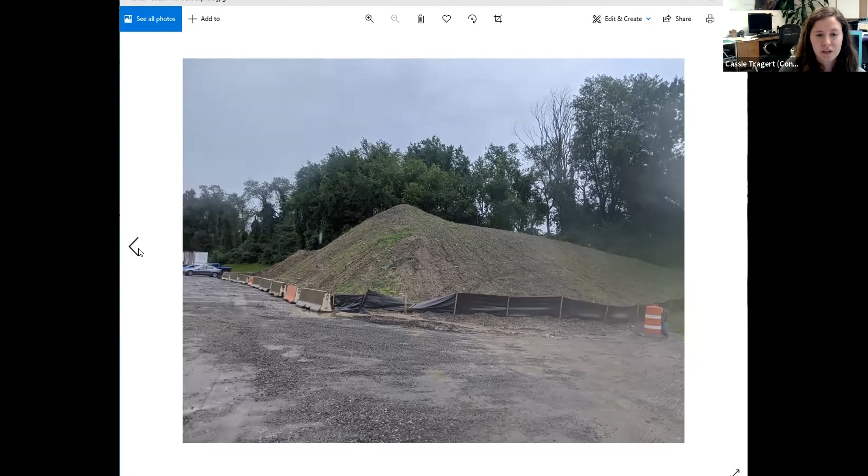This first image is the stockpile we were talking about. It has silt fencing and straw wattle on this side, and these kind of barriers. Let's take a closer look at this stockpile. The catch basin is to my rear and left here, so a ways down to the left—here's a picture of that area. This is looking back; the catch basin is more over to the right. This is the front, kind of coming down this way.

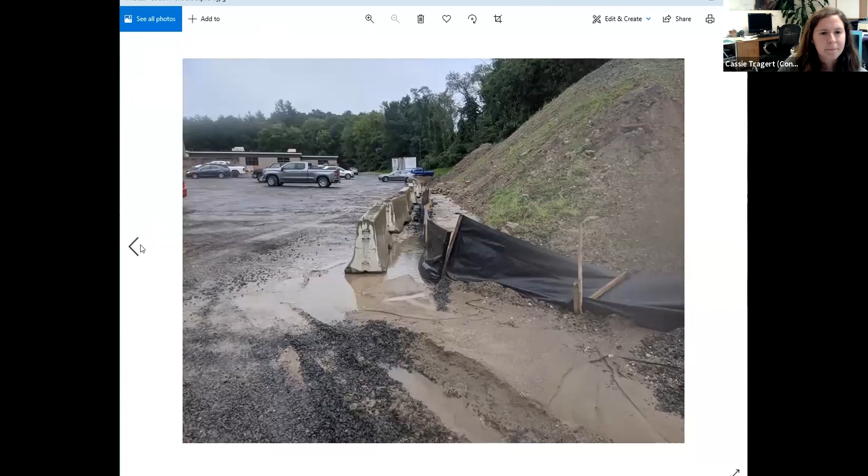So it seems like there's a lot of material on the down-gradient side of that siltation barrier. Yeah, I'll add that we did add a berm on the opposite side—you can't really see it in the photo—to give that silt sack and catch basin more opportunity to collect water and hold it on site.

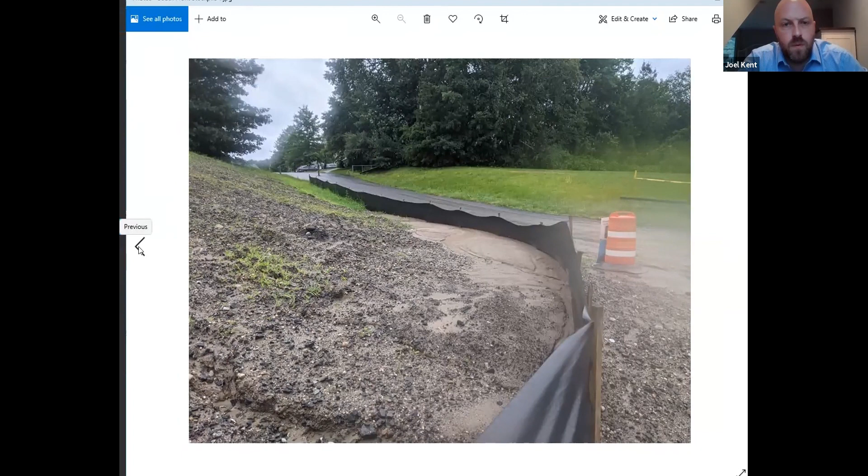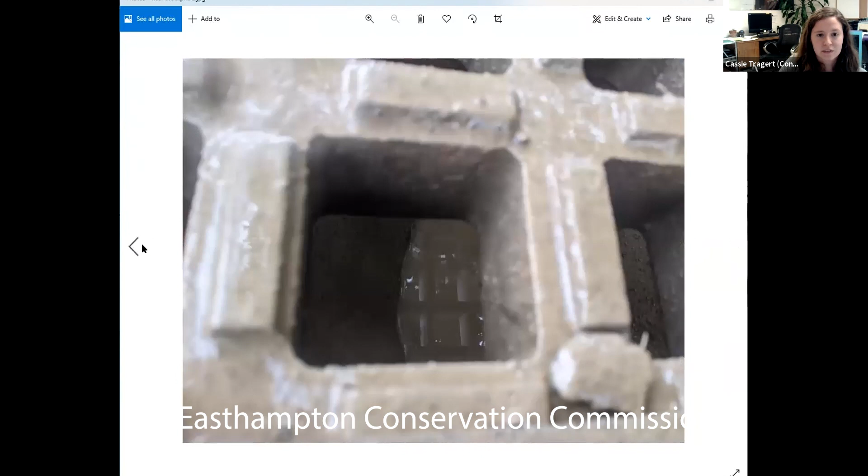This is approaching the area, and the stockpile is to the left over here. This is where they have this gravel berm—I believe that's the catch basin right there, and then there's silt fencing. That catch basin leads to an outlet that's kind of behind me in this picture and leads down this way, further towards the brook that's down there. This is the outlet itself.

Can you go back to the photo that showed the catch basin with that sack in the background, with a bit more of the landscape position? This one? Yeah.

So are there any supplemental measures that could be installed—since it's not in the middle of the parking lot—to intercept runoff first and filter out some of that material before it gets trapped in the silt sack device? So, is it possible to pre-treat before the BMP?

Yeah, one of the issues we've run into on this site, given how fine the sediment is, is that our filtration measures—typical wattles and so forth—aren't as effective as they might be on a normal site. We've done multiple layers of wattles and silt fence in many areas, which has been more effective. We've also put floc logs in most of the structures, though that's a more limited effect, just another thing we thought might help. In terms of pre-treating, we've been trying to do that and think it has been at least somewhat effective.

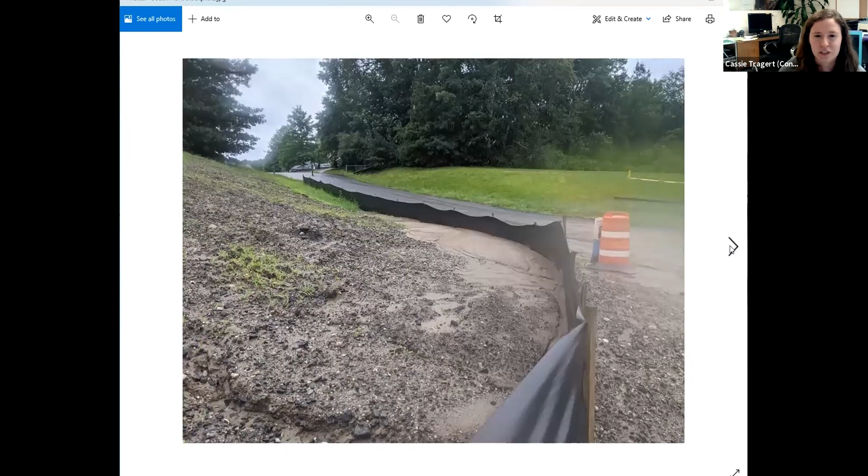Let me see, I should have a picture. Actually, this way.

So this is the inlet of the culvert, and then it goes through, and on the other side is the outlet where the turbidity curtain is. It was really overgrown here, so it's kind of hard to get access. But it certainly didn't look as turbid. I know there's sand built up here, but I don't know how long that's been there.

These culverts also don't have bottoms. You'd obviously see the stones. So that's the bottoms rusted out, I'm assuming. Yes, yeah, these were not to be changed through the scope of work. Understood.

And can you show photos of that turbidity curtain? Yeah, Cassie? So the catch basin area is behind me and to the left. There was an issue of water leaving here, and they put all these curtains that seem to be catching it there.

So this is the area up gradient of where the turbidity curtain is. You can see there's been seeding happening. This is the area between the basketball court and the parking lot where it was freshly seeded. Looking a little further, more up gradient, this is immediately before the area where the outlet is.

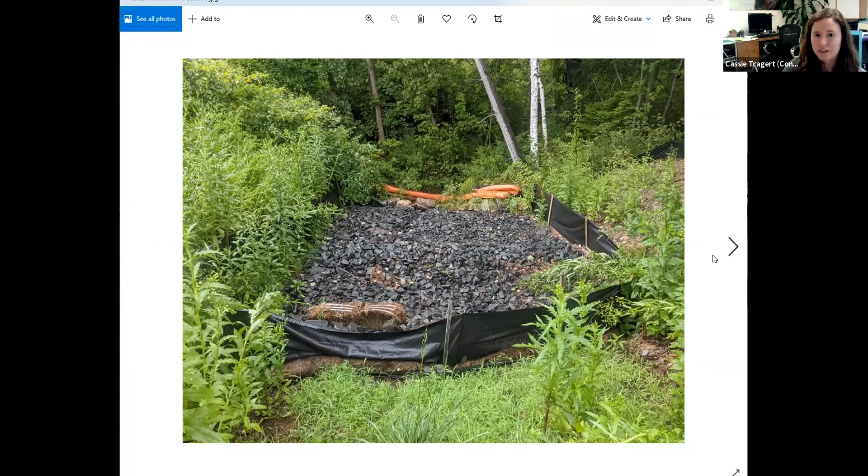This is the outlet itself, and there was silty water leaving the outlet. You can kind of see it here and here, and then that leads to this turbidity curtain, which is where the outlet is. That's the curtain, and this crease is where in some of the videos you could see it failing or overtopping at that point, but the water is clear, and here you can see it adding at this point, so it's not undermining it.

So on days where it's not a huge amount of rain, it seems to be functioning enough. They've already made an adjustment since the site visit - they sent me a photo where they've raised it up much higher, because this thing itself is 6 feet tall. Right now it's not super high off the surface of the water, and by the time they changed it, it's more up here, I'd say, roughly how high they raised it.

What has secured that at the stream bed? How is that secured at the bottom? At the bottom, I think it's these boulders placed to hold it in place. You can certainly see that where it's working quite effectively. The water trapped behind the turbidity curtain is quite turbid looking.

And do you have a close-up of the stream downstream of this, Cassie? Or could you? Actually, I don't. No, sorry, this is as far into the stream as I went.

After we added the turbidity curtain, around that time, I think it was last April, we walked the stream bed with the civil engineer to look for signs of sedimentation. And I think he produced a report for the commission at that time that basically said he saw no signs of sedimentation.

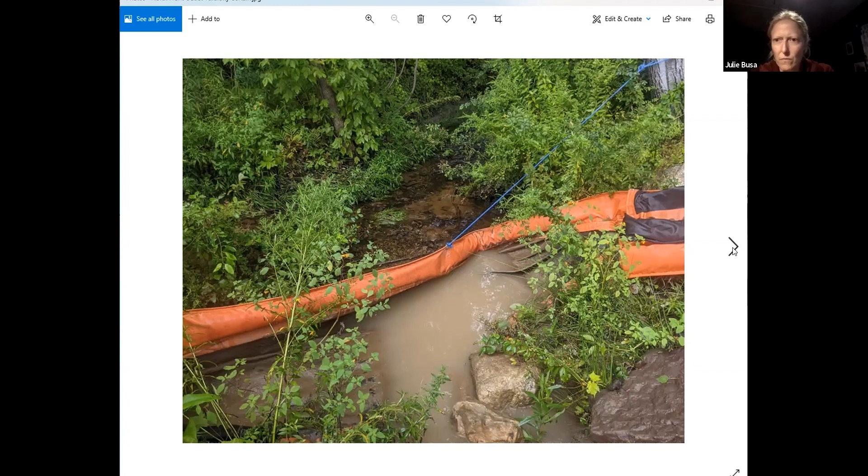So if there were a supplemental barrier at that catch basin, which of the two locations we've been discussing seems to be the bigger issue of the two? But Cassie, feel free to jump in and correct me if I'm mistaken or misspeaking.

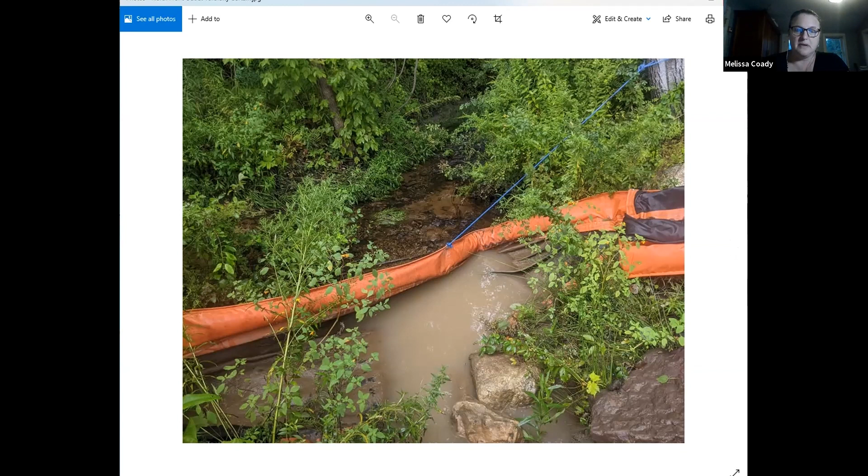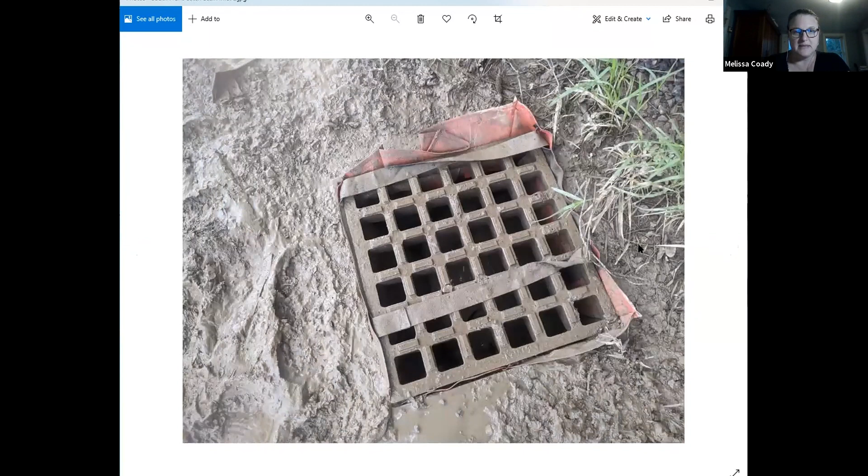If there were a supplemental barrier installed, it's just the way that photo looks, it seems like it would be somewhat out of the way, because the catch basin seems to be on the side near the edge of the parking area travel corridor, not sure what to call it there. If that were to redirect some of the flow that would normally go into that catch basin, what would the flow path be, and what would the BMPs at that down-gradient point look like?

It would fill up that area quite quickly and back up towards the parking lot, but the downhill gradient is towards that gravel berm. That gravel berm in the right of the photo continues for probably 20 feet to the right in that picture, and water will collect and hold in that area and dissipate, which is kind of what we want to happen.

That berm was originally erected to protect the slope. There's a downhill slope behind it that we were concerned about washout going down there, so that berm was put there to protect that slope. That slope has since been seeded.

If I was more comfortable with the quality of the water, I'd be more comfortable letting it get beyond there and follow its course into the detention basin, a bioretention basin just on the other side of that berm. But I don't want, at this stage of construction where we're going to be doing a ton of work on that side of the site later in the next phase.

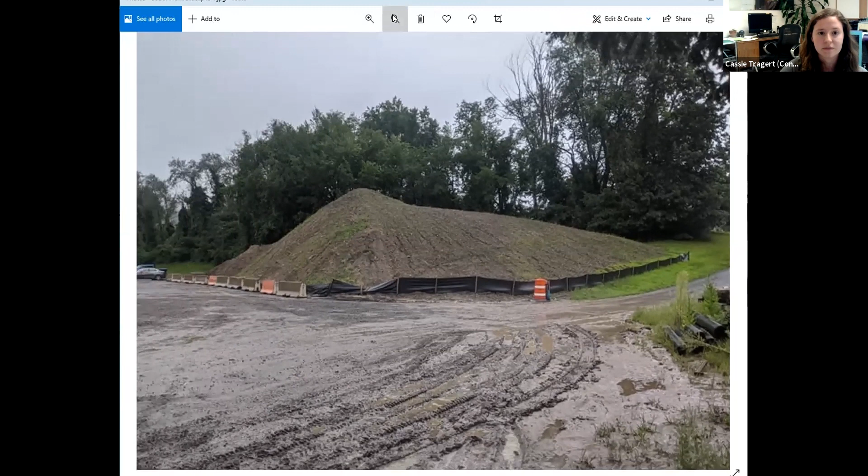Oh, the wrong way. Hold on, sorry about that.

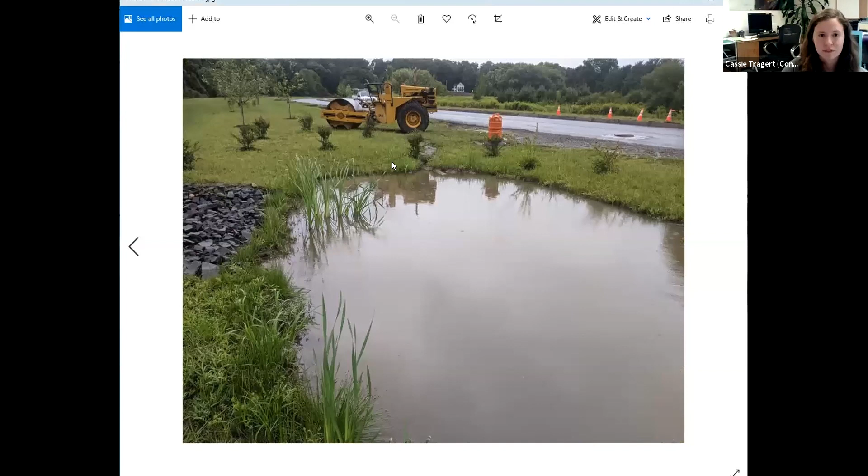So this is one of them, this is the other one. It kind of comes around, reaches these areas. The silt fences are to the left here, the series of silt fences—here they are. And then comes around, those two basins are around the corner here. So the stream outlet that I was looking at, which is in the woods, is to my left, and the berm is behind me, the gravel berm.

So Cassie, based on your discussions with DEP and your site visit today, what are your recommendations? Well...

You know, I guess I'm not sure what all the options are that the commission has available to it. The main thing was having this kind of enforcement order as a mechanism to do this third-party review. I don't know if that's the only way to do it, or if that's something the commission wants to pursue. And I don't know if, based off these two situations, the commission agrees that that's necessary at this stage.

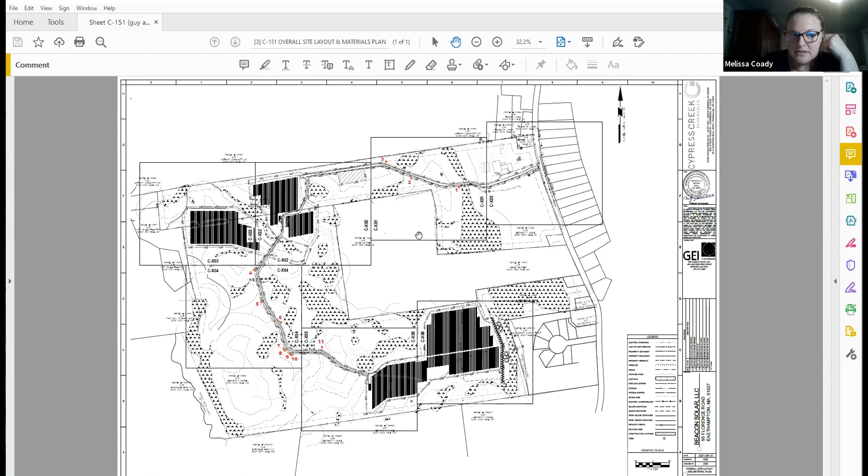So you can see there's 1, 2, 3, 4, up to 11. The ones shown are the ones that are within the 100-foot buffer zone. But like you said, none are within 25 feet. And I can zoom in on anywhere. Can you zoom in on that cluster around, down 7, 8, 9, 10, 11-ish, just that general region? Is that close enough, or I can do further?

No, I think those are clustered there because those two poles on the lower side of the road have two guy wires associated with each. So that's why you have 7, 8, 9, and 10. Those are really two poles. Is that because of the angles? Yes, it's because of the angles. Mhm. Okay.

And the dashed lines on these are the 100-foot setback boundary. So these are the pole locations, correct? Not the, or are those the guy locations? Those are the guy anchor locations. Okay, yeah, all the poles are within the limit of disturbance line.

I'm inclined to think that this is pretty minor, but I'm interested in hearing others' thoughts on the matter. I'm just thinking the helicals are not going to make much of a disturbance. It's whatever machinery you're going to have in there trying to install them, that would be the disturbance to me. Yeah, and primarily any kind of equipment like that would be located within the limit of disturbance area. Okay, reach over to install the helical? Right, I would hope so, yes.

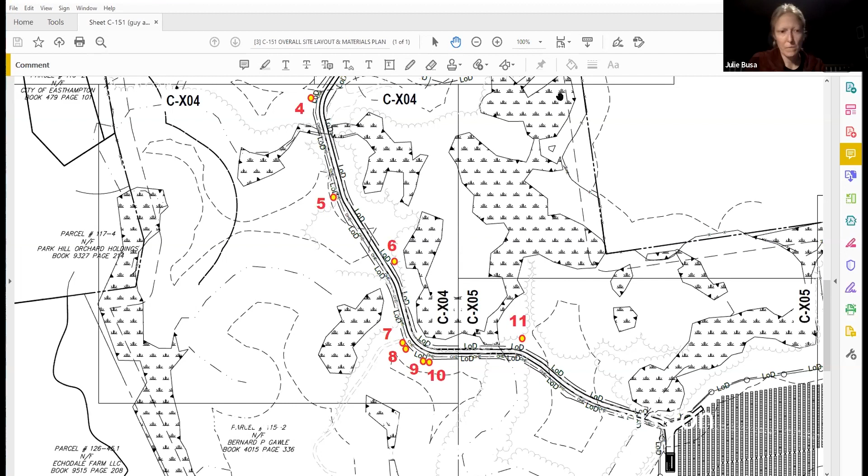Based on the fact that both DEP and the Corps under the Clean Water Act don't consider helical anchors to be fill because of their minimal disturbance, I am inclined in that direction. So I think the caveat I would say is that all equipment associated with the installation of these guy wire anchors should be situated within the limits of disturbance. That makes sense to me. Sounds good to me. Okay. Anyone else? Michael, Jay? I'm good.

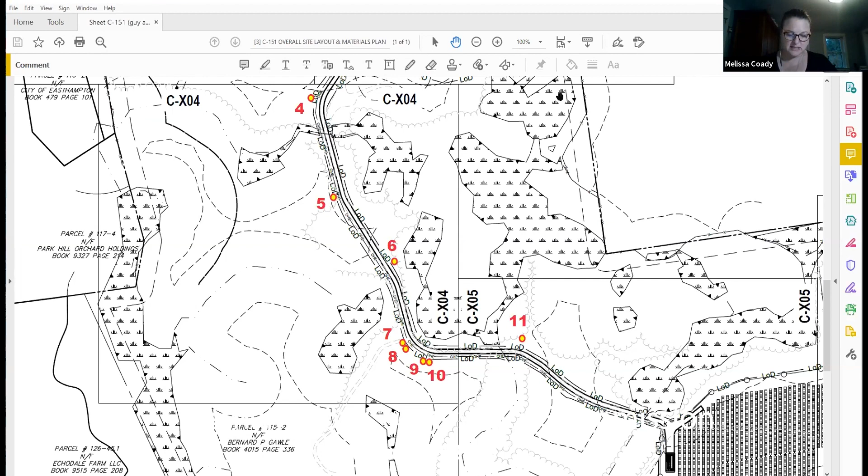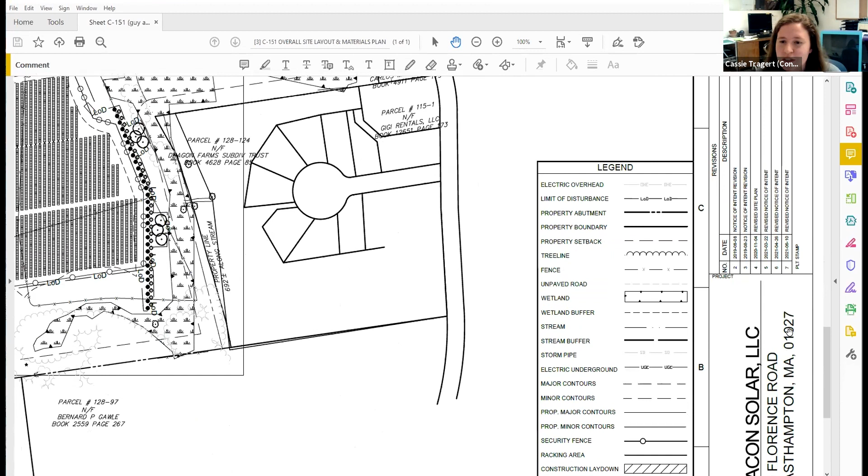Hold on, it looks like, what is that? 8/8? Nope, that's the wrong one. Hold on. I know you sent it to me after 6/10. Do you think it's maybe? Yes, I did not date this. Okay, put this together Friday. Yeah. What was the date you received it? On Friday, I believe, right? Yeah, so August 20th? Yeah. Okay, as received by the commission on August 20th.

Would anyone care to make that motion? I'll make that motion. Is there a second? I'll second. All those in favor, roll call vote. August recused, Busa aye, Buttrick aye, Ryan aye, Teffer absent, Whittemore aye. Motion carries. Thank you. Thank you very much.

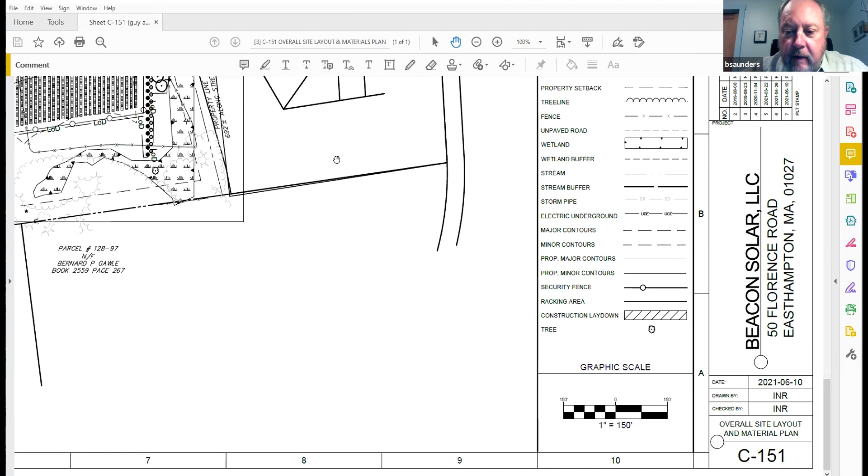All right, moving on to the third out of order agenda item, 8B, 32/50 Payson preliminary review. Cassie? I think you can go dark again, Mr. Buttrick. Okay, all right.

So this is for a question that was raised about Rubber Thread Pond, which is behind 32/50 Payson. It's in between the Rubber Thread Pond that is Williston and the Nashawannuck Pond. And the question is, does that pond have riverfront area associated with it?

There's been past permitting for 32 Payson for the safety complex that they did. And it actually, that permitting was completed right before or around the same time that the riverfront area part of the act was added, so it's not on those plans. I don't know if it would have been.

I will note that the pond is shown on the USGS topographic map as a named pond, specifically just this middle part, not the other two. And also, the main thing for defining a pond is... we're gonna hold on a second. Sorry, I was reaching out of screen. It's okay.